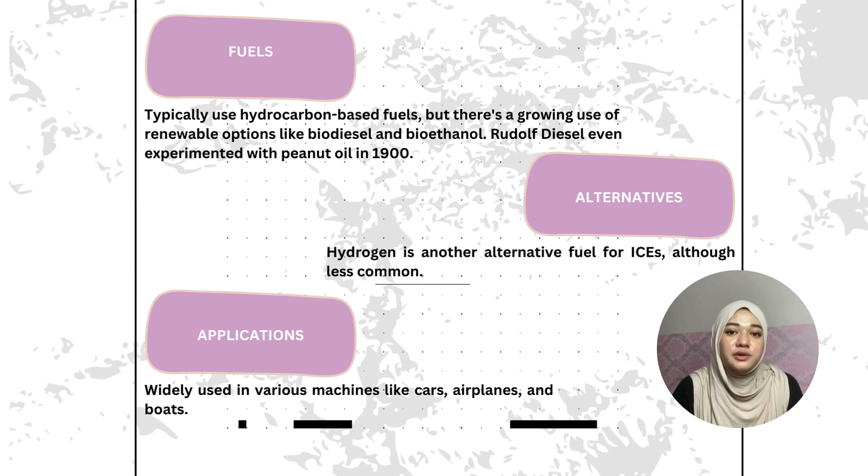First, the introduction of internal combustion engine. There are basic principle, purpose and type of internal combustion engines. They are about fuels, alternative and application about internal combustion engines. There are adaptation, history and importance of internal combustion engines.

Secondly, the introduction of hybrid electric vehicle. Lastly, introduction of battery electric vehicle.

Internal combustion engine is often criticized for its environmental impact. It indeed raised a concern about air pollution. One of the conflicts is that the internal combustion engine creates air pollution in two ways: first by releasing primary pollutants directly into the atmosphere, and second by creating secondary pollution through chemical reaction with elements in the atmosphere. From that, it threatens the environment and causes global warming.

Looking at the electric vehicle, it also raises a conflict with the cycle impact of the batteries' disposal and the recycling process.

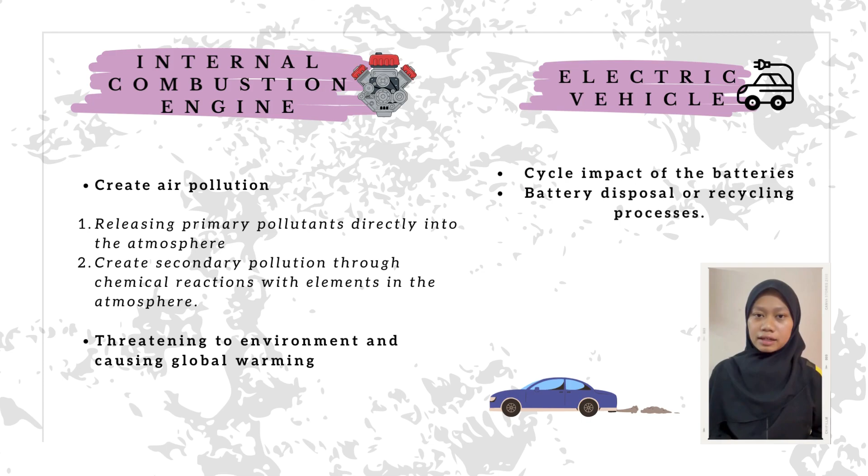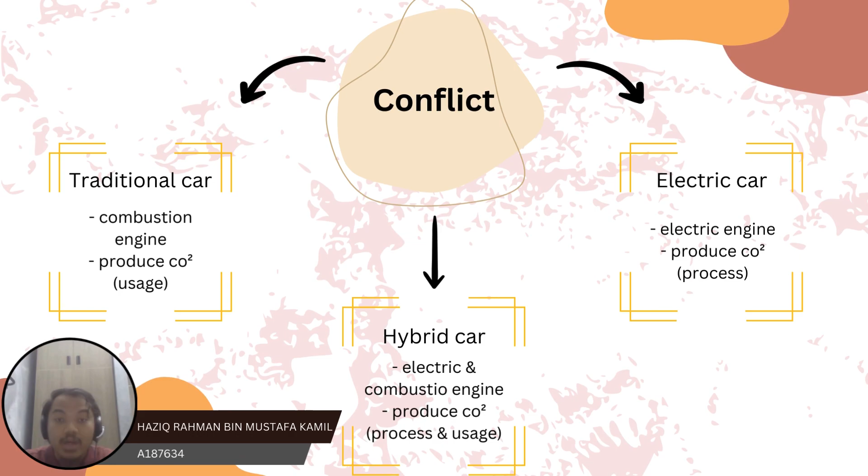Assalamualaikum. So now I'm going to talk about the factors that contribute to the conflict, where it is about the difference between those three types of car based on the carbon emission. The two factors are the difference and the movement.

The first factor is movement. No need for a car if we don't even need to go anywhere, but sadly we can. Our ancestors used to move to find food and stuff, but for us now we move because of work and money. Next factor is the difference between them.

For electric cars, while they indeed produce zero emission, the process of making the battery is not that environmentally friendly, and it's quite the same when recharging those batteries. For hybrid, although it carries both flaws as a combination of electric and combustion, its effect is not as bad as you think because of the optimization it offers.

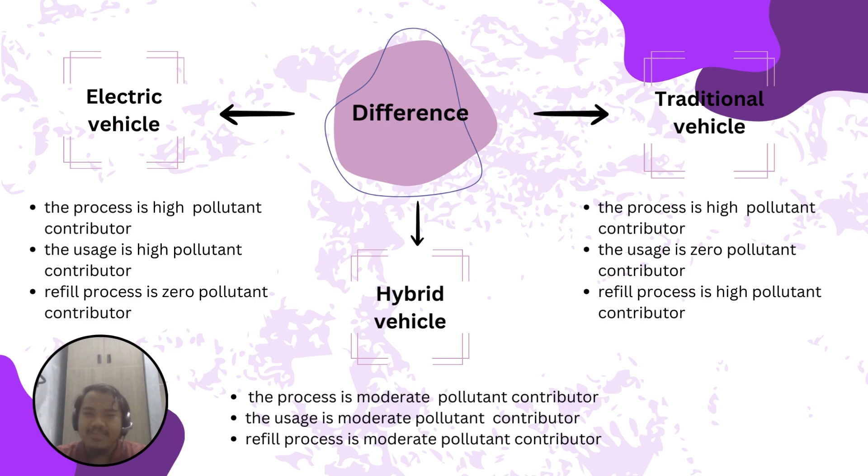So now when we compare those two with traditional cars, the effect does not really differ that much, and this is the main cause of the conflict. I will explain about internal combustion engines.

Okay, so the first factor is in terms of ethics. It comes from our own decision to choose this type of engine as our main vehicle for daily life. The next one is in terms of safety, because higher usage of this type of vehicle could lead to risks to the safety of consumers and also pedestrians.

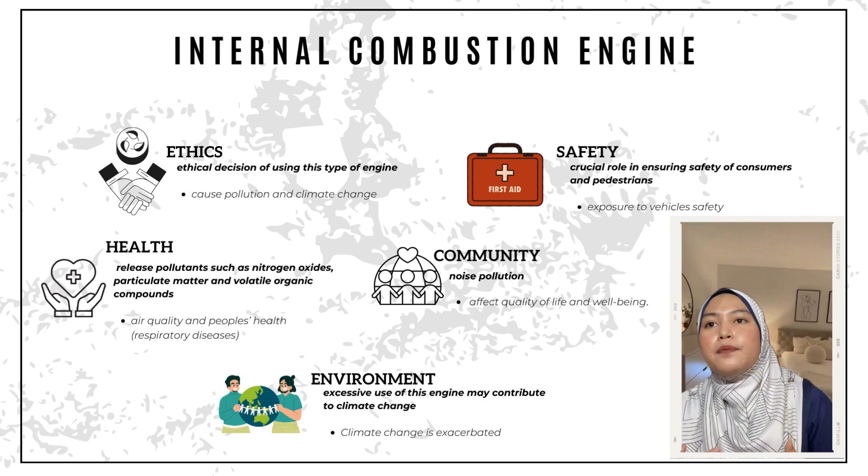The next one is about health. As we know, these engines actually release more pollutants because the usage of this type of engine is higher. And as we know, this engine actually releases nitrogen oxides, particulate matters and also volatile organic compounds.

And the next one is about community. It could lead to noise pollution because this kind of engine is quite noisy, and it could affect the quality of life and also the well-being of the community.

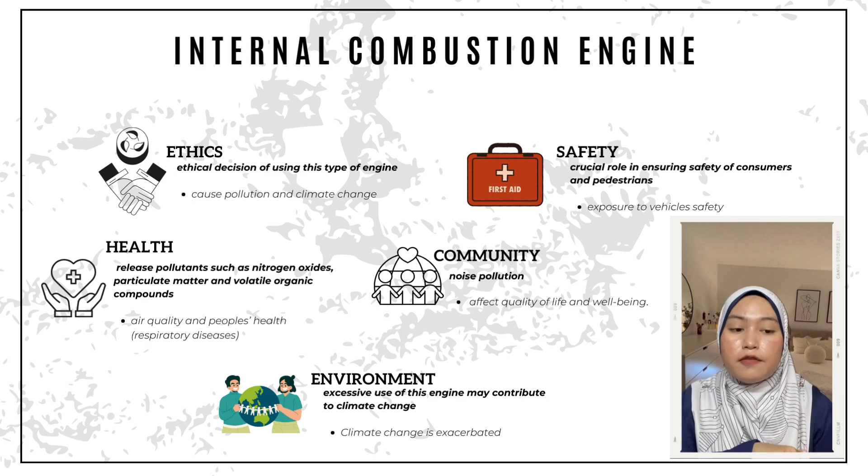The last one for this part is actually the environment. It could affect our environment because the excessive use of these engines may contribute to climate changes.

Hybrid electric vehicles: for ethics, the production of hybrid vehicle batteries involves the extraction of rare metals, which can contribute to environmental degradation and human rights abuse in mining areas.

For health, HEV's internal combustion engines also add to air pollution, which makes laws reducing emissions and lowering related health risks necessary. For environment, HEVs generally produce lower greenhouse gas emissions and air pollutants compared to traditional internal combustion engine vehicles. This can lead to improved air quality and reduced contribution to climate change.

For safety, HEVs use high voltage battery systems to power electric motors. Accidental contact with high voltage components can pose a risk of electric shock. Lastly, for community, when operating in electric-only mode, HEVs produce less noise compared to traditional vehicles.

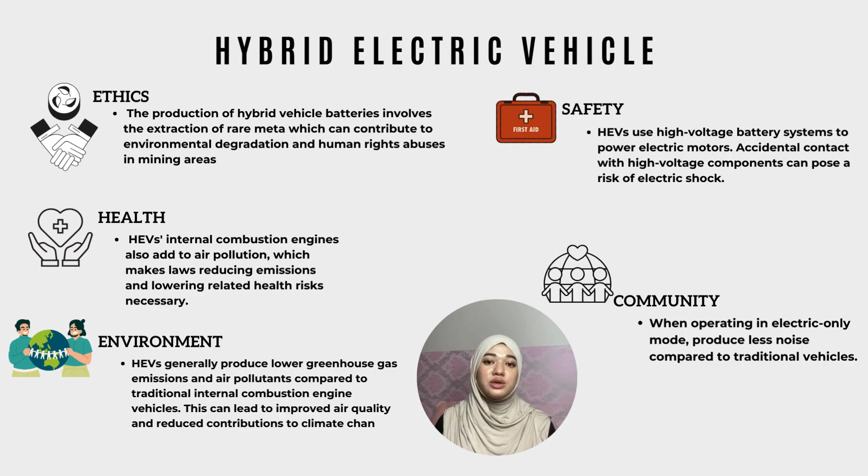Next, battery electric vehicle. For ethics, the mining process can result in environmental degradation, exploitation of local communities, and unsafe working conditions for miners. Ensuring responsible sourcing and ethical supply chain practices is crucial.

For health, BEVs help mitigate climate change by reducing greenhouse gas emissions. For environment, the increasing demand for BEVs may lead to competition over essential resources, potentially exacerbating global inequalities and contributing to resource depletion.

For safety, lastly, BEVs have a high voltage battery system to power the electric motor. Accidental contact with high voltage components can pose a risk of electric shock.

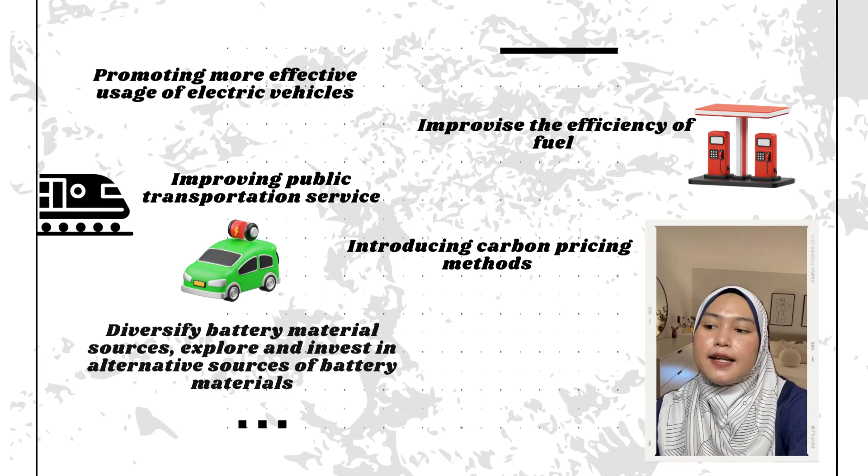From the problems arising and all the conflicts that we stated before this, I could identify some solutions for all those problems for each type of vehicle.

Alright, so I could say the first one is promoting more effective usage of electric vehicles. The next one is improving the efficiency of fuels, which means continuing innovation for our fuels. And the next one is improving public transportation service, not only in the city but outside the city as well. So the next one is introducing carbon pricing methods.

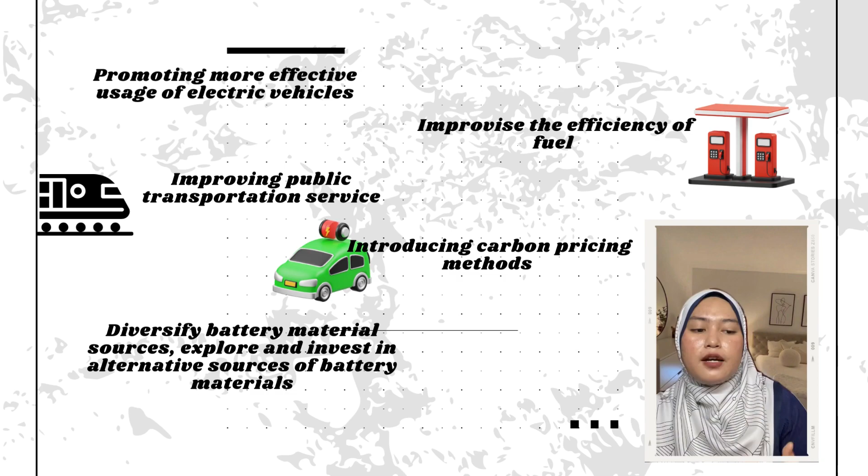One is diversify battery material sources: explore and invest in alternative sources of battery materials.

A lesson that we can learn from internal combustion engines and electric vehicles is that we need to be cautious about unexpected effects and practice responsible innovation. The next one is the evolving environmental landscape; this teaches us to continuously prioritize environmental issues as we negotiate with technology. And the last one is the importance of development instead of remaining stagnant, which leads us to work toward sustainable development.